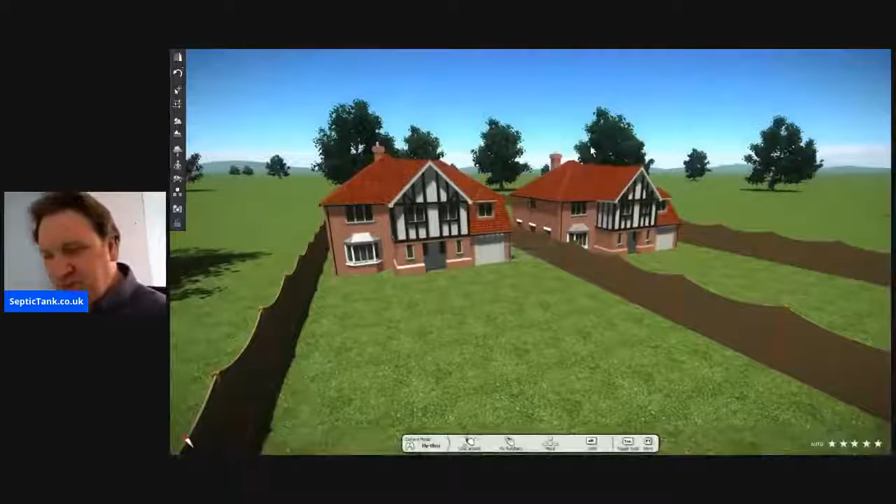So let's jump straight into this live broadcast today. So here we go. So here's a property. And here's two properties, not one property, but the point is, one property is connected to a septic tank, and this property shares a septic tank. So let's just go down the garden and see what's going on here. Let's give you a typical example of how it works. So there's the two houses in the background there, and here is the septic tank. So the septic tank for both properties is in the one garden here.

So let me give you a bit more clarification on this. Let me make it clearer for you now. So basically, if I just go forward a bit to make it easier, all the wastewater leaves property number one, and it comes down this pipe and it enters the septic tank here. So here's the septic tank. Now the soakaway, let me show you where the soakaway would be. The soakaway is here too.

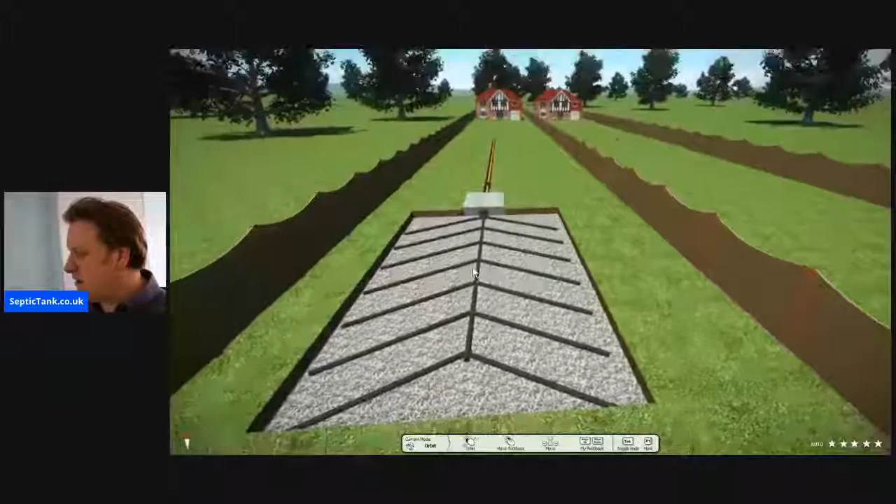So that is an overview of the septic tank system that is in, say, your neighbour's garden. So all their waste, as I said, leaves the property, comes down the pipe here, goes into the septic tank, and then the liquid just drains away into the soakaway. So that's that property. So let's say this is your property here. So typically, the setup would look something like this.

So your wastewater would leave the property here. It would then come down here into a pipe, and typically it would then go into a manhole chamber there, and then your pipe would go across your garden under your neighbour's fence, like so. You can see that, and then it would come in and spur into here, and then your liquid would go into their septic tank. So let me give you an overall view of that.

So there is the neighbour's pipe going into the septic tank. There's your pipe here. There may be a junction there, or the pipe may run straight from the house, but the point is it goes down here, it hits a junction here, and then it goes into their septic tank. So that is typically how shared systems work. So what are the ramifications? What are the problems with a shared system?

Well, there are many. This is how I got into the business, to be honest. When I first got married, I moved into a Victorian terraced house. There were 4 Victorian cottages, and the end cottage had the septic tank and the soakaway in the garden, pretty much like I've just showed you. And the other 3 cottages all had pipes going across our lawns and connecting into their septic tank. Now, funnily enough, the lady whose house the septic tank was in didn't get on with any of the neighbours.

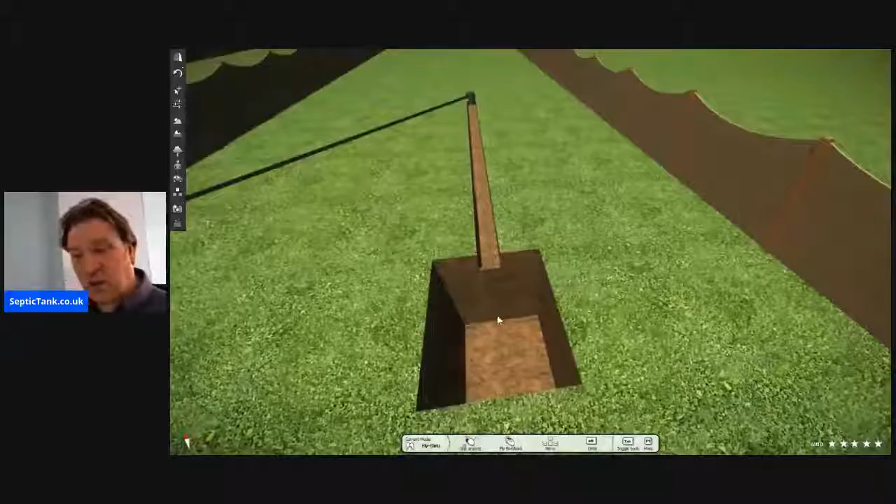So what you do, you dig a hole for your septic tank. Then to get your levels, you dig a trench from the manhole chamber that you're connected to. So that's what it looks like. You just literally dig a trench from there to the hole where you're going to put your septic tank. Okay, that's pretty simple, isn't it? You can dig the trench first and then dig the hole, or you can dig the hole first and then dig the trench. It's entirely up to you.

It doesn't matter. It's like scone or scone. Some people like their jam on top of the scone first and then the cream on top. Some people like the cream first and then the jam. It really doesn't matter.

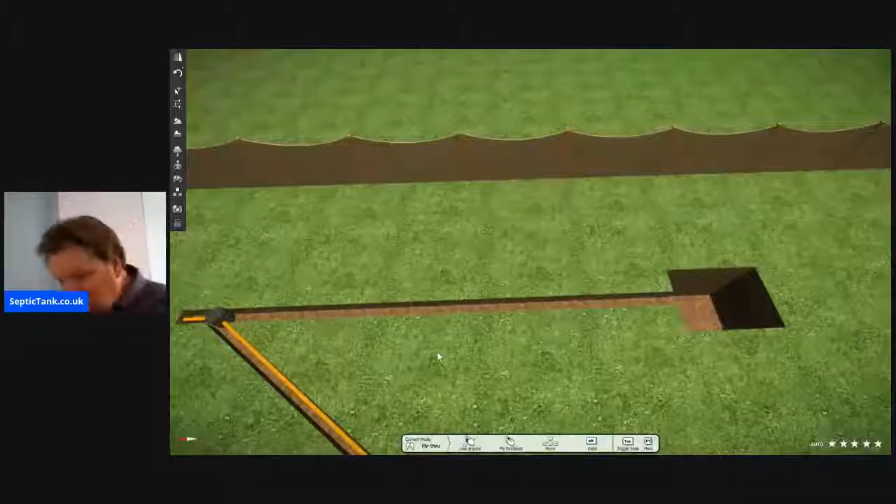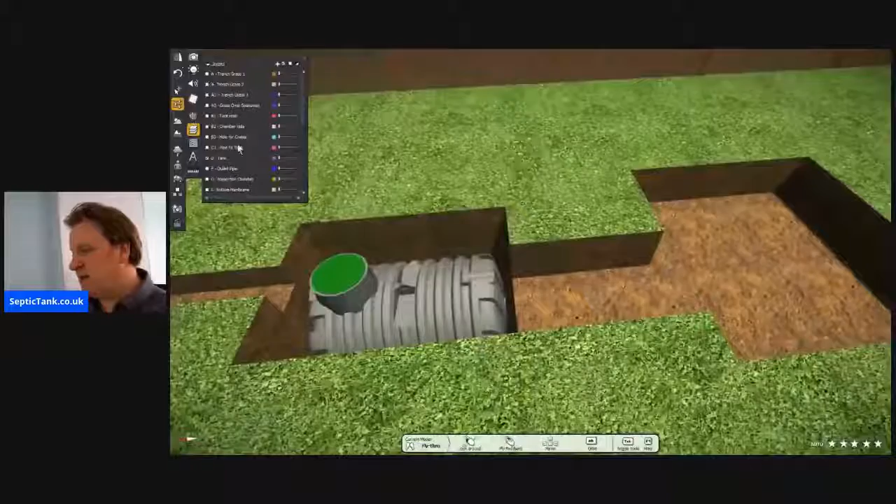Okay, so once you've done that, let me now get a closer view here. Once you've dug your hole for your septic tank, this is typically what I would do. I would then dig 2 more holes, and I'll show you what they're for right now. So in the first hole, you're going to put your tank. There you go. It's nice and simple, isn't it? And these are low profile septic tanks that I'm talking about. You can put any septic tank in you want, to be honest, but the tank that I'm putting in is a low profile septic tank. And the reason I'm putting that in is because they're really, really shallow.

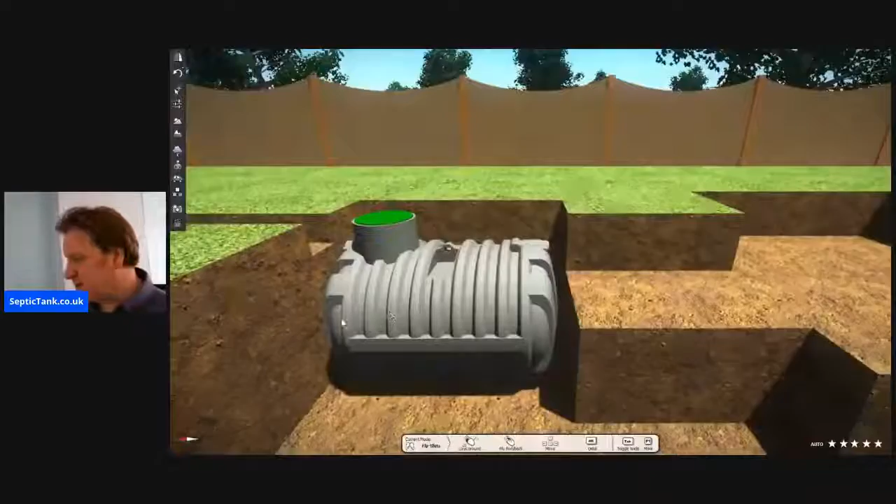Some septic tanks are really deep. These are shallow septic tanks and they don't need any concreting whatsoever. All right, so next, after I've put my tank in, you'll notice there's the outlet pipe on the septic tank there. So after I've done that, I then just put a pipe from the outlet pipe into an inspection chamber. You'll see what this is for in a minute.

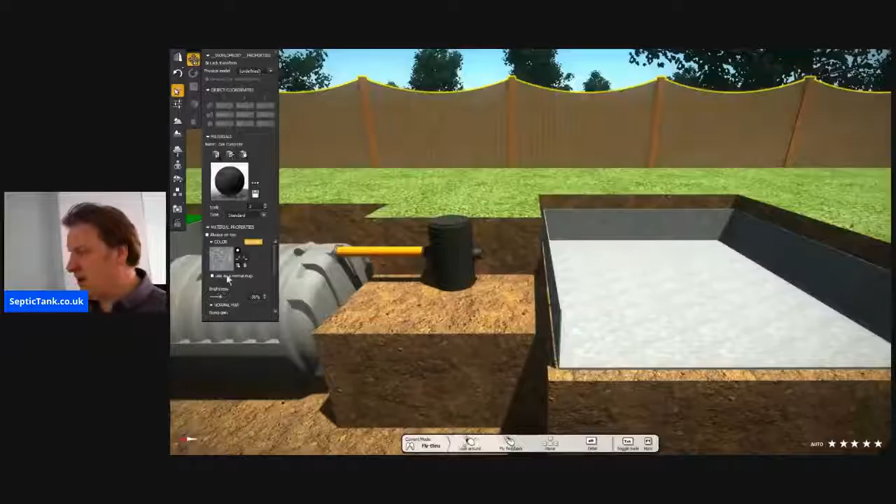Then, personally, my favorite soakaway is the septic tank soakaway crates. So you put some membrane down like so. Now let me just tell you a little bit about the soakaway crates. Some people quite rightly say, well, I heard that you can't put crates as a soakaway. You can't use rainwater crates. You're not allowed to use rainwater crates, but you can use septic tank soakaway crates.

Okay, so first of all, you put some membrane in the hole like so. And then let me show you what I do. I then lay my septic tank crates into the hole, like so. And then I connect the pipe to the crates. That's pretty simple, isn't it? Okay, so there you go.

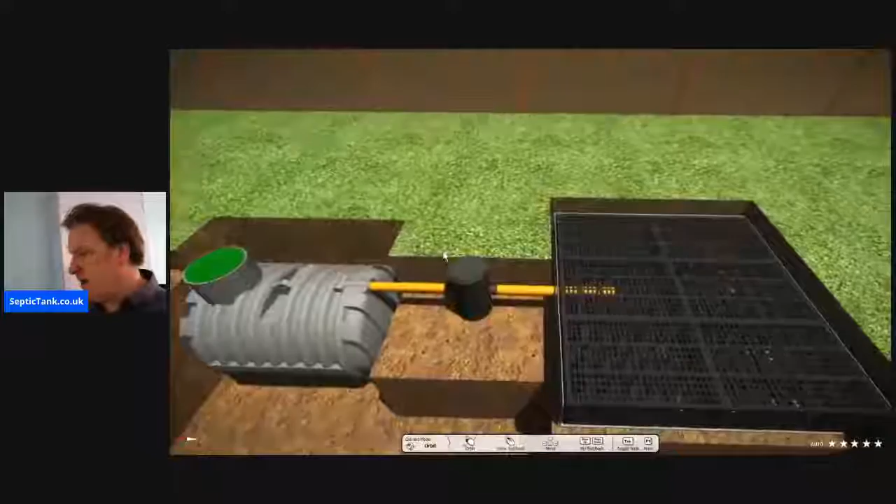So far, even if you've got no experience, this will probably take you about 3 hours to do. About 40 minutes to dig the hole, an hour and a half to dig all the holes, and I don't know, an hour to put everything in. But let's say it took you an hour and a half to dig the holes and an hour and a half to put everything in. You're up to about 3 hours so far, okay?

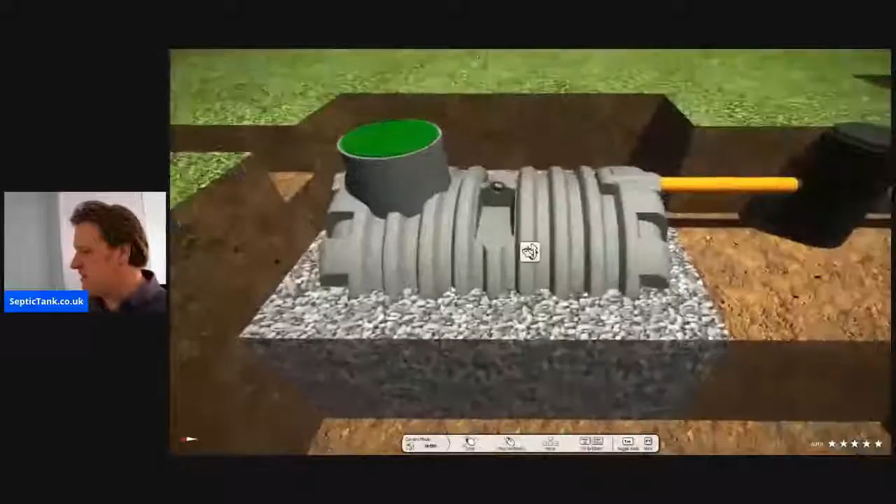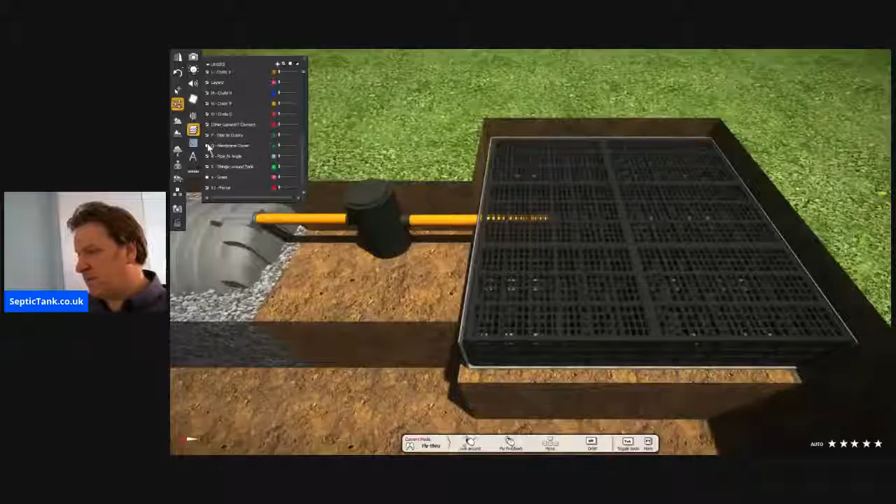So then when you've done that, let me just show you what it's like now with the grass back on. Oh, well, first, let me show you this. Once you've done that, with the low profile septic tank, they don't need concreting, they just need shingle. So I just literally put some shingle around the tank, typically to about halfway up the tank, like so. And when I've done that, I then cover the septic tank soakaway crates with membrane. You just put membrane over the top of them. There you go, just like that.

So let me just put the grass back on now, if I can find the grass. Man alive, where's the grass gone? All right, here we go. Oh, no, that's not the grass. That's the trouble when you're live. There you go. Hooray, I found the grass. All right, so let me zoom out a bit now and show you.

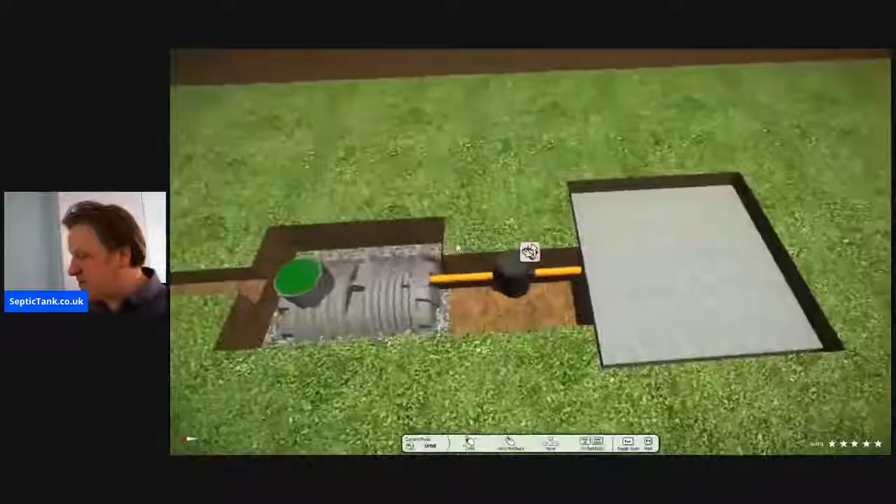So that is what your septic tank and soakaway will look like. There's your house. There's still the pipe that you're connected to your neighbours. So let me show you an aerial view. Next door, there's your neighbour's garden, and that's their septic tank that you're feeding into. And here are the holes that you've dug, and here's your septic tank, and here's your soakaway that you've put in your hole.

So when you've done that, this is really good now. This is the most exciting part. Come on, I'm going to show you this. What you do now, you connect a pipe from the inspection chamber here to your septic tank. So let me just connect the pipe. When you've done that, you put pipe to tank. There you go. And this pipe is the pipe that connects to your neighbour's septic tank.

You know what you can do with that, don't you? You can literally just get rid of it. So let me just get that off now. There we go. You can just literally get rid of it and fill the trench in. So there you go. You've just literally cut yourself off from your neighbour's septic tank. That's how easy it is. So now if I give you an aerial view, their septic tank is still connected to their property. Their waste is still going to their property. You haven't altered that in any way, shape or form.

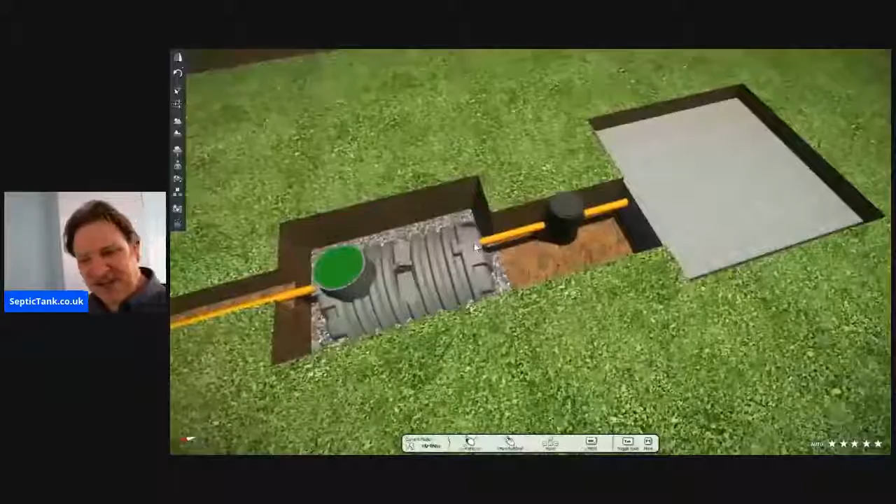So here's your septic tank and soak away. So we're on about 3.5 hours now. This is what it's taken you to do so far. All right, so from there, you literally just put soil back over the crates, put soil back over the chamber, and put soil back over the tank, right? It's as easy as that, and you can seed it, or you can turf it, whatever's easiest for you.

And then what you need to do now, right, is get the champagne ready, or get the wine out, because this is the crowning moment, right? On the last trench here, you just literally cover that over with soil, just like so, okay? So there you go. So let me cover the neighbours over. So there you go. That is how to disconnect yourself, cut yourself off from your neighbour's septic tank sewage system. So it'll take you about 3 or 4 hours to do from start to finish.

So your neighbour's happy because he's still connected to his septic tank, right? You haven't altered or adjusted, or you haven't even been on his land. You don't even have to go on his property. You can just literally do it. It's that easy to do. And I'm going to show you something else now as well, all right? So now I've shown you that. Let me just get that down, all right? So I've showed you the legal issues and how to get around the legal issues of having a shared septic tank.